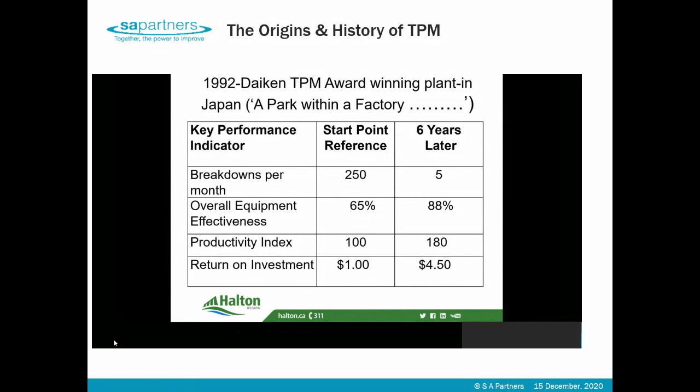Site-wide overall equipment effectiveness was up from 65% to 88%, a productivity increase of 80% over those 6 years, and a per dollar payback of a ratio of $1 to $4.50. Very impressive by any standards.

Immediately after the team presentation, I vividly remember the Japanese managing director then walking up to a flip chart and progressively writing. In the 50s and 60s, we had M for manufacturing. Then in the 70s, we had IM for integrated manufacturing. And then in the 80s, we had computer integrated manufacturing.

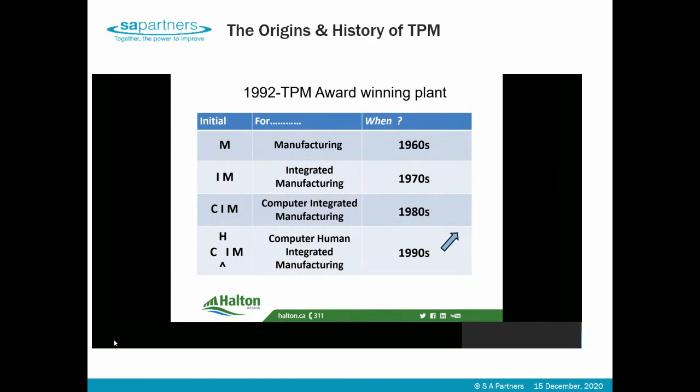He paused for a moment and then said, "For the remainder of this decade and 2000 and beyond, our company is going to be pursuing CHIM, Computer Human Integrated Manufacturing." He added, "As you have witnessed today, we've decided to reintroduce the human being back into the workplace." As illustrated here, CHIM is no dream, it's a pressing reality.

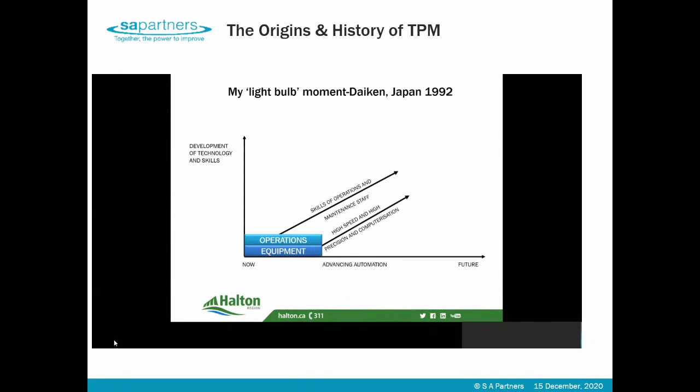Today, nearly 30 years later, my interpretation of that powerful message is that it certainly represents a challenge for all of us to develop and harness people's skills in parallel with advancing automation, data capture, and technological innovation in what's being referred to as the 4th Industrial Revolution or Industry 4. The bottom line is that it's our people at the sharp end of the business who will continue to make a difference.

The biggest and often false assumption nowadays is that regular visible and physical human inspections and maintenance are grossly undervalued, and you could say that the technological tail is in effect left wagging the dog. The tail's an important part of the dog, but in this analogy, the dog is a human being. As such, we also need to remember our heritage in the sense of maintenance engineering development and where we've come from over those last 60 years.

In the 60s and 70s, we moved from single-skilled to multi-skilled in the 80s and 90s. Today, as in Halton Region, we have flexible teams who are responsive and adaptive as circumstances present themselves.

What we're going to need from now onwards to take full advantage of Industry 4 is resourceful, all-purpose teams of operators and maintainers, together with their supervisors who are involved in the decisions and are autonomous within clear boundaries and rules, which they themselves had helped to set through the proactive support of the utility-wide leadership team that's committed to a consistent and clear, visible leadership style that in effect trusts to delegate. And that's precisely what TPM sets out to deliver, those attributes.

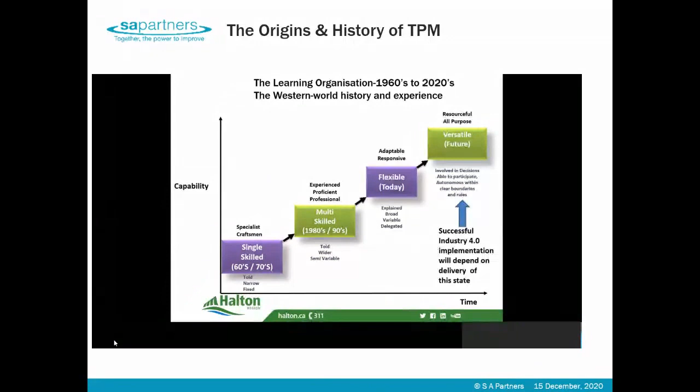Whilst embracing technology, there will always be some principles of work and values that will remain embedded within the philosophy of TPM. Of course, we'll need to be agile, flexible, and innovative on how we adapt to the challenges that Industry 4 will bring. And indeed is already doing so in terms of, for example, the Internet of Things, big data and advanced analytics, remote condition monitoring, artificial intelligence, robotics and automation, and so on.

Against this backdrop of reality and acceptance, I'm also personally convinced that true and lasting enhanced quality of life in the workplace will come from those enterprises who focus on a selective but well-judged and hence smart application of available automation and technology.

Already, we're seeing that the fundamental and underpinning people engagement practices through teamwork, goal alignment, and deployment depend on the leadership style that's able to progressively trust to delegate. This factor will become even more important as technology becomes even more multifaceted.

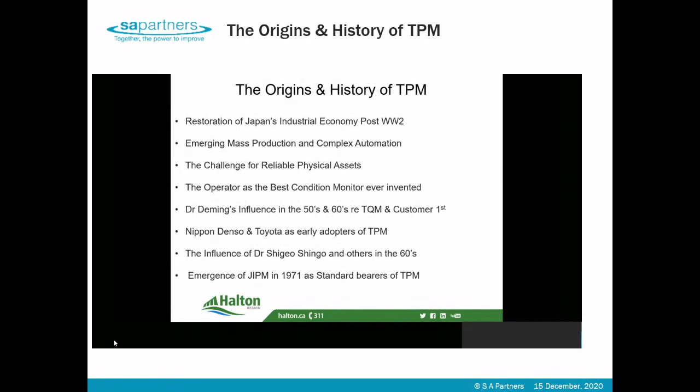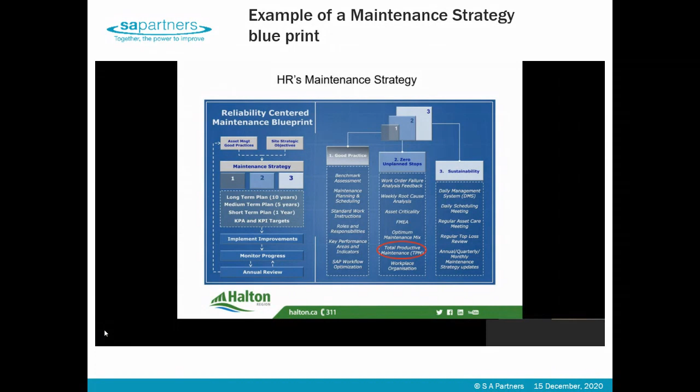Well, firstly, let's just remind ourselves of the 5 founding principles of TPM, which mainly came from the early work of Nakajima and Suzuki and their colleagues from the Japan Institute of Plant Maintenance. So let's look at each of them in turn. So the first one is to increase the true effectiveness of the asset, which is often measured using the OEE, or overall equipment effectiveness. An OEE is a measure of the availability multiplied by the performance rate of the equipment, multiplied by the quality rate that the equipment is processing or producing.

And common factors that affect OEE are often referred to as the 6 classic equipment losses, being breakdowns, changeovers, and running at reduced speed, minor stoppages, which do not need a maintainer to attend, but require the operator to intervene, for example, a jam or a blockage. Scrap, poor yield, rework, not achieving the correct quality parameters. And the 6th loss, which is startup losses that occur after unplanned stoppages or after a changeover or at the beginning of the process.

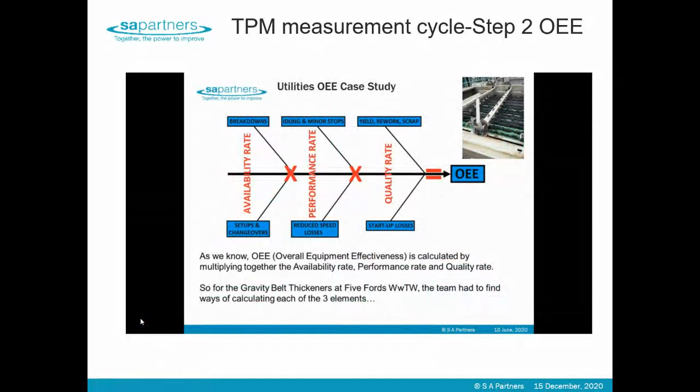So we're going to have a look at a couple of those steps now. We'll start with the first two steps, which is sources of data and come up with an OEE measure. So this is the thing we're talking about here, which is the gravity belt thickener, for those of you who haven't seen one before. Basically what it's doing is just processing sludge and dewatering it. So the team's challenge here was to think about how can we measure availability. They don't have setups and changeovers. It's on the same process all the time, but they do ultimately suffer from breakdowns.

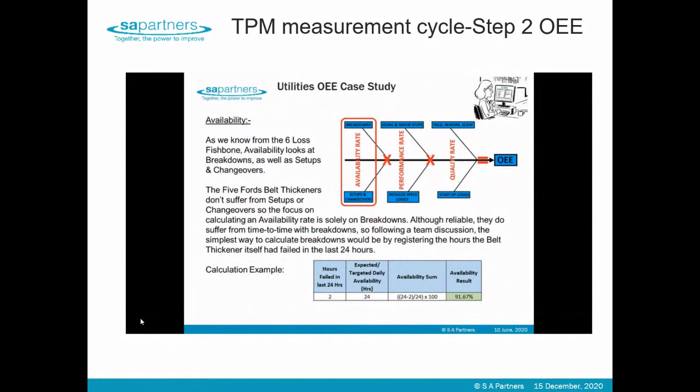And using SCADA, which is the top right picture, as a source of data, they're able to look at the number of breakdowns they've had, which caused the belt thickener to fail. And they were able to come up with an availability figure. And as you can see, it's pretty reasonable there, just at 91.67%.

Performance was a bit of a challenge for these guys because basically we are trying to calculate the performance of how well we can process sludge, okay? And interestingly enough, the team found that the actual running speed of the belts was 8 litres per second against the 15 litres per second, which is the nameplate capacity.

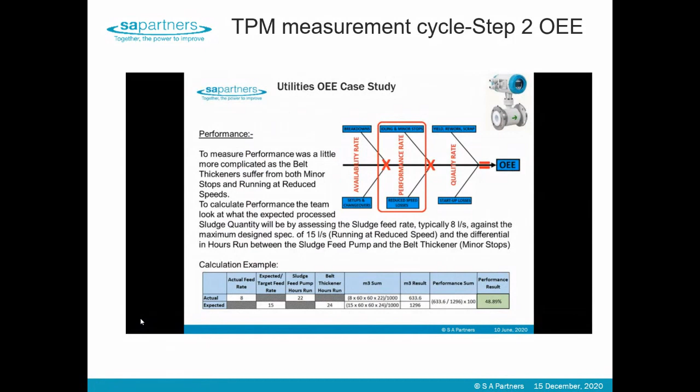And how do we actually measure the amount of sludge that we process? Again, one of the sources of data was to use flow meters and calculate the actual amount of sludge processed. And here you can see from the calculation of the performance, we came up with a figure, a baseline of 48. Quality, again, interestingly here, because the target quality they're trying to achieve is 6.5% dry solids.

And the point with the percentage dry solids is it's got to be right for the next process, which is the customer in this process, the digester. Under will cause issues with the digester in terms of additional heating, and over will cause issues further downstream. So they're measuring the actual percentage dry solids coming off the belt against the target. And under and over is just as bad as each other.

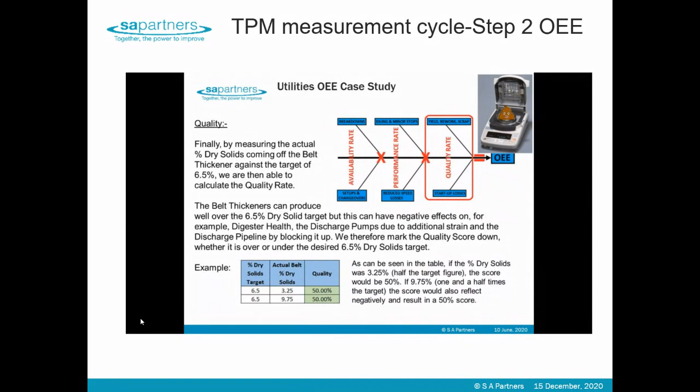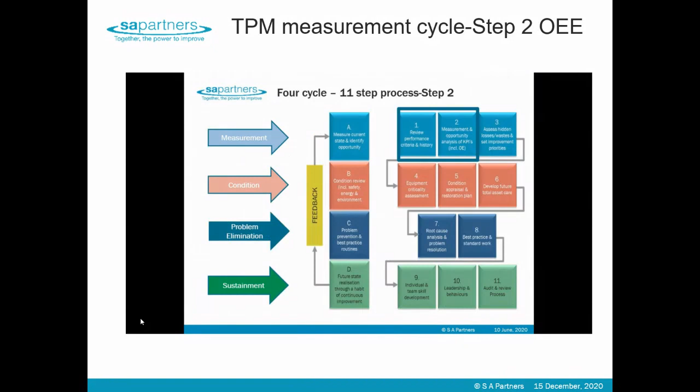So you can see the figures there. 3.25 is a 50% quality, and 9.75, which is over processing, which also means additional poly and all those things. They came out with a baseline figure of 22%. So we're going to have a look at a couple of those steps.

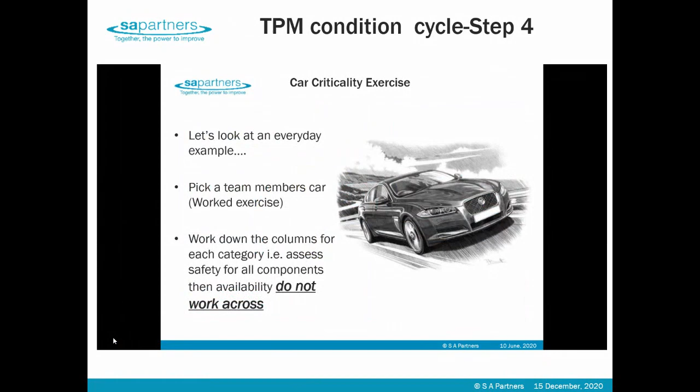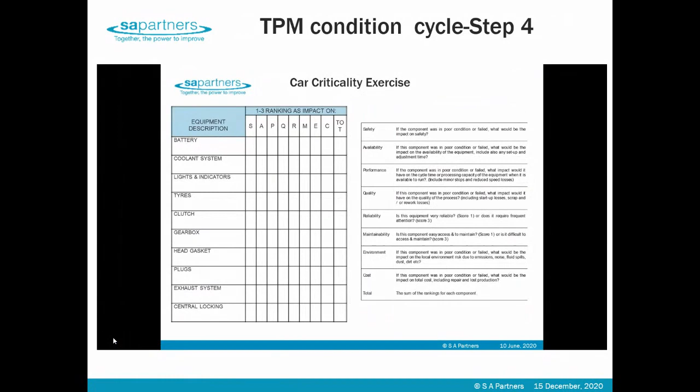Okay, so we're going to move swiftly on to step 4, which is about the criticality assessment. So one of the pieces we use in the training is the example of a car, and we get the teams to choose one of the team members' cars. And this is the criticality assessment sheet, which is split into all the components and the various categories of safety, availability, performance, quality, etc.

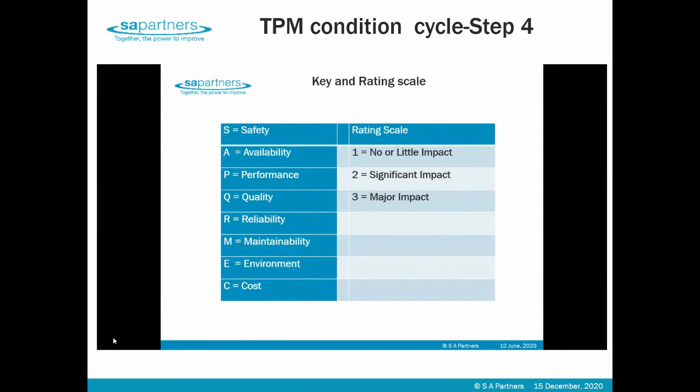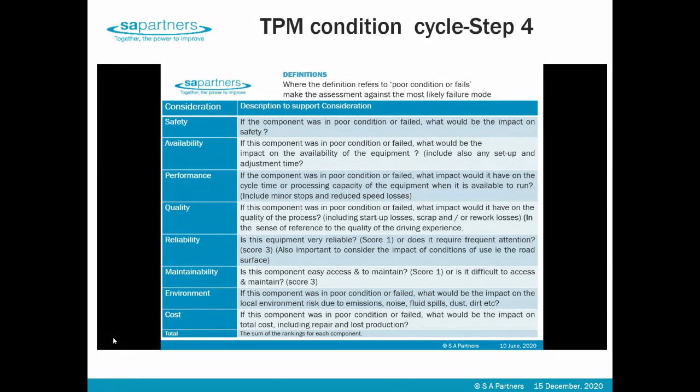What the guys do is they look at these categories and they use a rating scale of 1, 2, and 3. So, for example, safety says if this component was in poor condition or failed, what would be the impact on safety? Would it be a 1, a 2, or a 3? And there are some categories there that are not all the same, some are different. So, for example, reliability says, is this equipment very reliable? Score a 1. Or does it require frequent attention? Score a 3. Okay, so we're going to move.

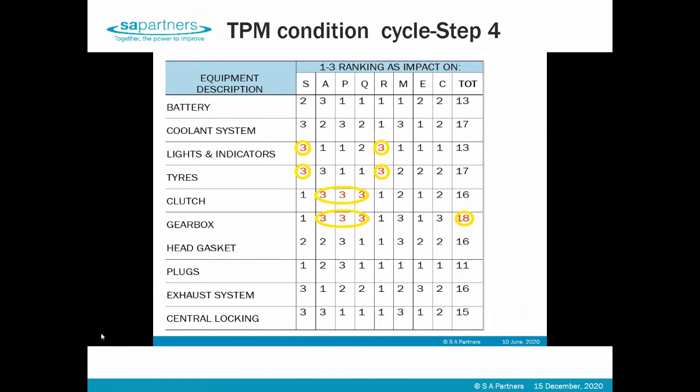If you look at the example output, where you score a 3 under safety and a 3 under reliability, that's basically an accident waiting to happen, which is why the driver, the operator, and not the garage, the mechanic, takes responsibility to visually and regularly check the condition of the tyres and the functions of the lights and indicators. And those components scoring a 3 under A, P, and Q, which is obviously OEE, have the biggest potential impact on OEE, so they need to be kept in the optimum condition.

And the point behind the criticality assessment, it does these things. It gets the team to work and understand functionality. So in fact, before diving out and doing the condition appraisal and a deep clean in the equipment, without doing cleaning without meaning, which I often refer to, they understand functionality. Knowing what the critical components are, they can use that as part of the checklist on the condition appraisal, and it helps them focus on future TPM asset care. And it also highlights weaknesses regarding ease of operation, inherent reliability, and ease of maintenance. Okay?

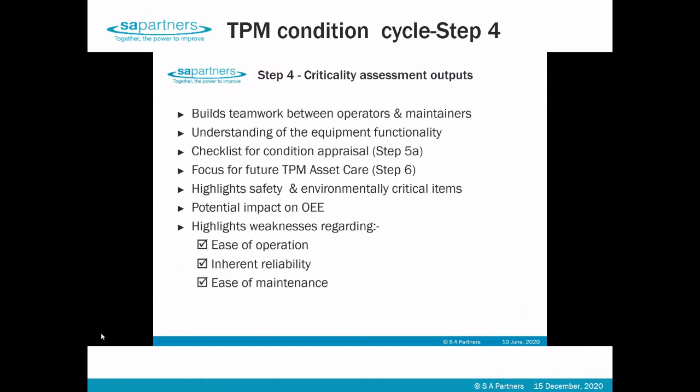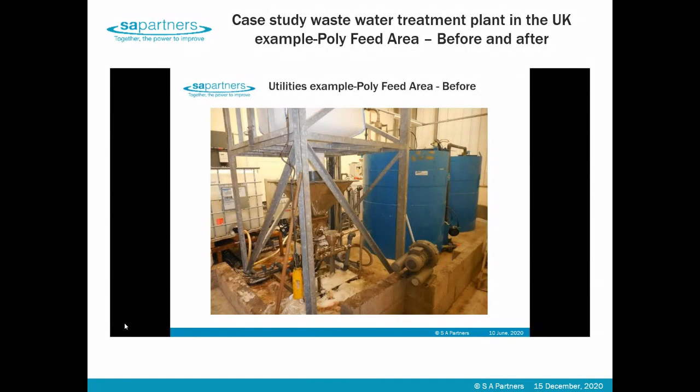So this is a photo I showed you before of the poly feed area. What you can see here, the floor is very slippy. The material bund area is damaged, and we've got leakages from the bund area on the wall. The IBC bags from the poly are spilling because the diameter of the pipe is too narrow. And then we look at the restored condition following a refurbishment. That's not just an area that's been tidied up. That is some weeks since that initial clean has taken place.

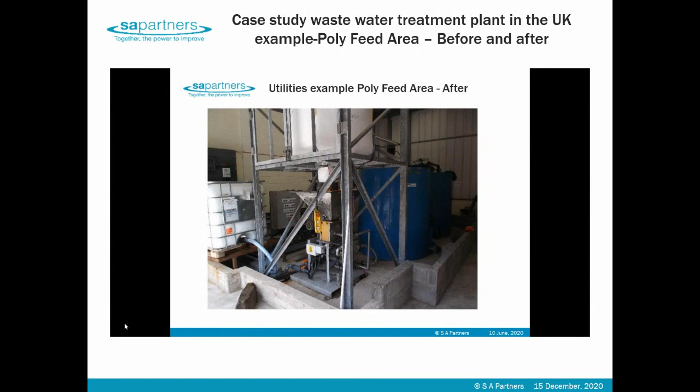But what's happened there is we've done a number of things. The guys have widened the diameter of the pipe. They've repaired the bund walls. They've got the IBC on an incline to improve the yield. Then the blower has been installed, and what the blower has done is it's reduced the noise level. It's acted effectively as a silencer. And the interesting thing is, from here to here, hearing protection no longer became mandatory as a result of the improved reduction in decibels in that particular area.

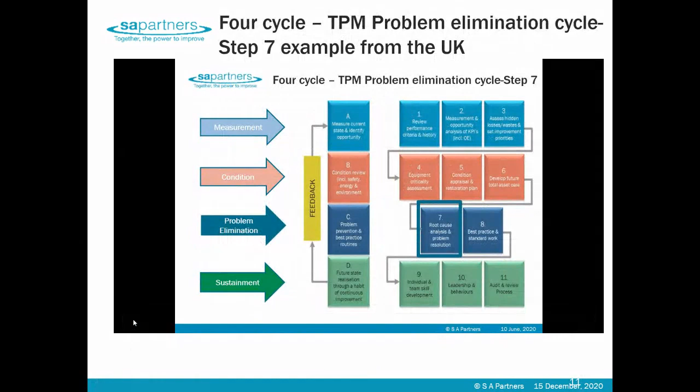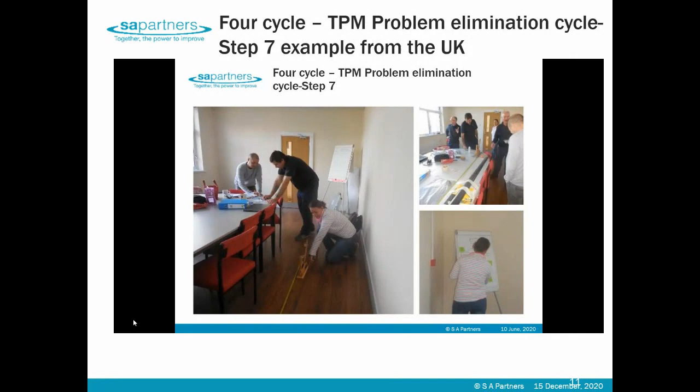So just in terms of problem solving, step 7, we talk about root cause analysis and problem solving. And here we've got some pictures of some problem solving training taking place with the team using the statapult simulation, which I'm sure you're familiar with, to help learn a 4-step problem solving process, and then putting that theory into practice. And this is a particular example where they're looking at an issue with the sensor on the gas methane plant, which resulted in significant improvements in gas generation, which is worth a lot of revenue to this business.

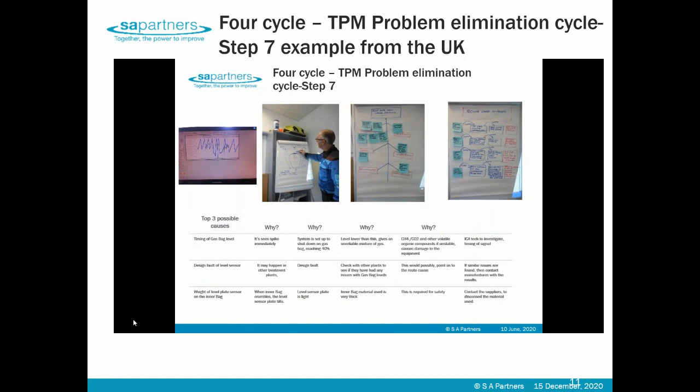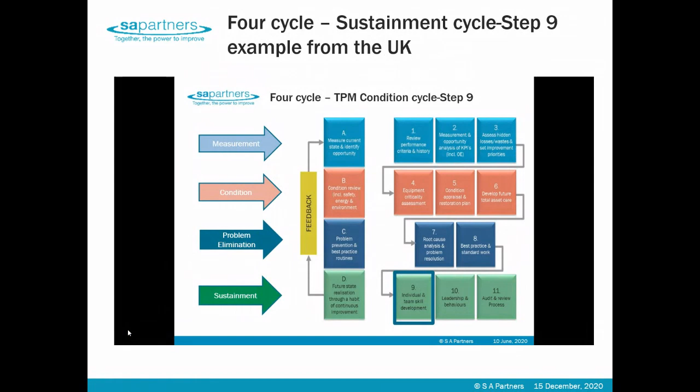So I'm going to skip to step 9. So step 9 is about individual and team skill development. So here's just some examples of some of the stuff that the guys in the wastewater treatment plants have done in terms of the skill development. SNF, the supplier who supplied the poly material, came in to run a masterclass on the gravity belt thickener and train the team in the ideal parameters for dewatering sludge.

Masterclasses run by lots of different OEMs on centrifuge operation. Alfa Laval came in and did some training on the centrifuge for the MEICA and the operators. General training on digesters. What's the chemistry behind the wastewater treatment plant? How does a digester work? What are the ideal conditions for the digester health? And the teams also did quite a lot of green belts through the lean competency system.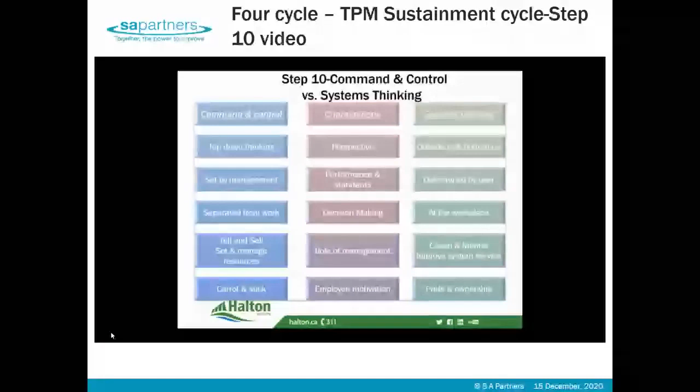So we can move on from that thinking and perhaps illustrate it as shown here of what is the better style, right? The boss, the command and control, probably inspires fear, finger points blame and uses people and then takes the credit, as opposed to the leader on the right-hand side, who manages with respect for both the individual and the collective team and generates enthusiasm by developing people and giving them the credit and asks their opinion and takes note of what it says and says in effect, let's go and give it a try. The leader who inspires trust to delegate and actively listens and responds accordingly, like any good team coach.

These positive leader behavioral attributes start to cascade down through the organization, resulting in what we see here, where the team leader's supervisor's job, with the proactive support of that positive leadership process owner style, is to do three things: to manage and deliver the operational processes for that particular shift, to manage and progressively develop their own team of people, and to target some form of target-driven improvement, continuous improvement. Now, those first two are usually both given and accepted. And if the third one is regarded as optional, it will not happen.

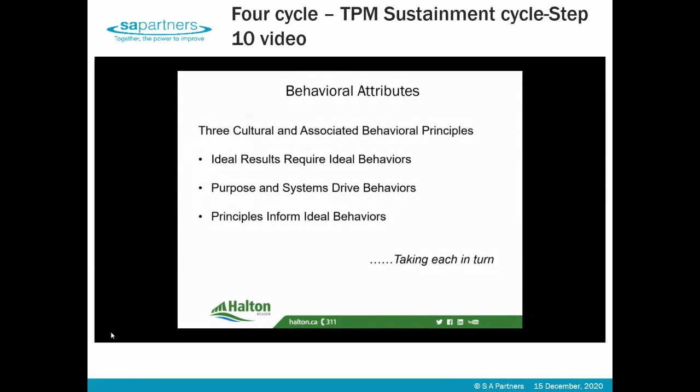Spend a bit of time now looking at the key considerations for delivering a culture of effective partnership between utility asset owners and their operations and maintenance service providers. Our agenda is going to be to, first of all, explore the evolution of outsourcing, to look at the ideal of partnership and its principles, and to develop a progressive reward structure, and finally look at the ingredients for success.

So looking at the evolution of outsourcing, it's really gone through three generations. The first generation was characterized by rigid service level agreements and a hands-off relationship, and tended to be essentially adversarial with a them and us attitude and atmosphere. The second generation, with a move away from the pure business driver of pure cost cutting to one improving the effectiveness of the resources and physical assets.

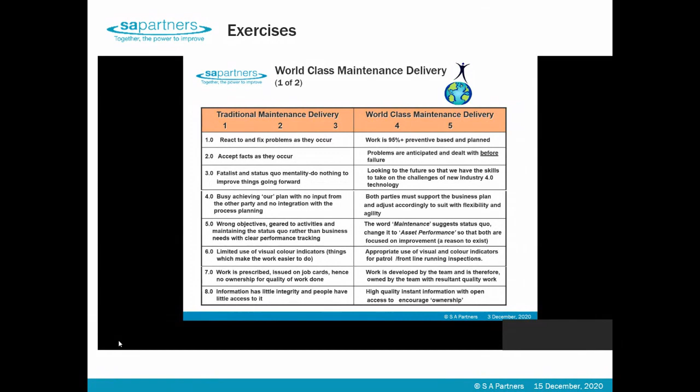But pick number 5 at random, it doesn't matter. Number 5, we have wrong objectives. We're geared to activities and maintaining the status quo rather than the business needs with clear performance tracking. So you would rate yourself on the scale, which is on the next slide we'll look at in a minute, 1 to 5. Or is it the fact that the word maintenance suggesting the status quo is changed to asset performance, that both are focused on improvement with a good reason to exist? And there's the other one.

Now let's just pick on one of those. Just please go back there to number 13. There is no control and it's overtime orientated, which means less work gets done during normal hours. Or is the process managed and teams are self-motivated, behaviors are developed to match the role and drive the right behaviors? What a huge difference. Are you 3, 4, 5, or 1?

Here's that rating scale for you to use. And there's also on the next slide where you can enter your score there, 1 to 15, to add up your total. If you had a row of 15 fives, you would score 75. If you had a row of ones, you'd score 15. So let's see where you end up your score, and you would put it in this grid.

If you end up with an honest score between 15 and 29, it would suggest you have a major opportunity to improvement. If it was 30 to 44, with significant scope. If it's 45 to 59, we're doing well, but can still gain some benefits. If you're in 60 to 74, you'd be world class. If you give a 5 to all 15, you're either disillusioned or you're the world's best.